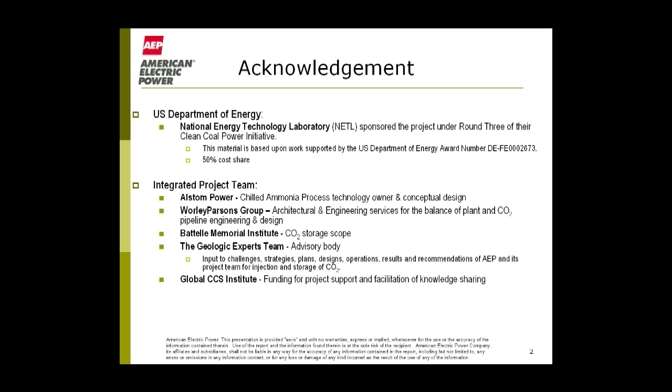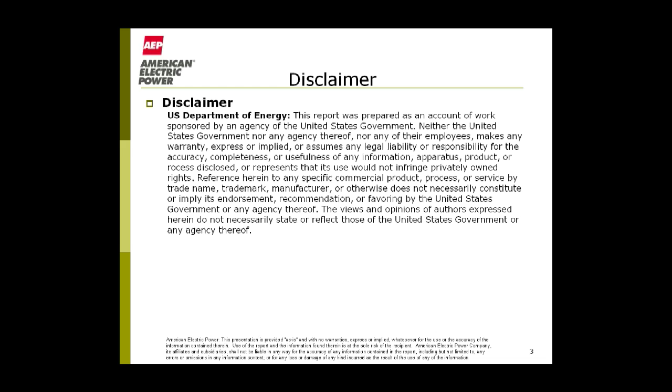This was a Department of Energy funded project, so we have to adhere to their rules as we go through the project. So there's a legal disclaimer there that we had to put in.

But what I'm going to do today, in the 25 minutes that we have, is just give you a brief overview of AEP and of the Mountaineer plant. I'm going to talk a little bit about the project from a very high level, just what our overall project objectives were, and then I'll give a brief introduction to the chilled ammonia process, which was the technology we were using. Then I'll talk through the FEED technical objectives, the summary of the FEED activities that took place, and what our deliverables were to get us to the level of accuracy that we had in the cost estimate.

I'll go through some of the key FEED studies and investigations that had to be completed up front to set the design basis for the facility, and then I'll talk through our final conclusions and key technical takeaways of the conceptual design. Then I'm going to turn it over to Guy to discuss our estimating approach, the project cost estimate, some of the major risks and opportunities we determined, and talk through some of our risk modeling.

AEP operates in 11 states. We have upwards of 5.2 million customers in those states. As you can see on this slide, and I won't go through it all in the interest of time, our coal and transportation assets tell the tale of where AEP's priority lies in its generating capacity.

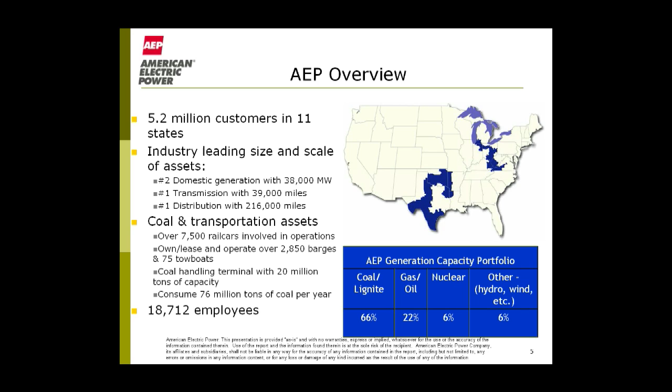Mountaineer plant is located in West Virginia, just southeast of the Ohio border. We're right on the border of the Ohio River, about 30 minutes from Charleston. That's probably the biggest city that New Haven is close to. Mountaineer plant is operated by Appalachian Power Company.

It's a single 1,300 megawatt pulverized coal plant. It has an electrostatic precipitator, an SCR, a wet flue gas desulfurization system, and it also has SO3 mitigation with a Trona system. The primary fuel is bituminous coal.

Mountaineer was a host site for Alstom's 20 megawatt product validation facility for chilled ammonia. There are 2 on-site CO2 injection wells that were used for that project, and that facility operated from 2009 to 2011. We captured upwards of more than 50,000 tons of CO2, and we stored nearly 40,000 tons of that CO2 on site. We're currently in post-injection monitoring phase of that project.

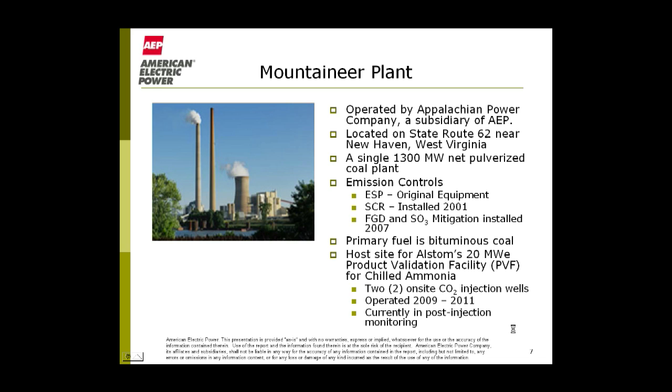So we had already had some experience with chilled ammonia from the validation facility, and we wanted to make sure that we carried that into the commercial scale project. The purpose of the commercial scale project was to advance the development of Alstom's chilled ammonia process technology and demonstrate CO2 storage and monitoring at a commercial scale.

I already mentioned who the project participants were and where the project was located. We went through some preliminary cost estimating with DOE and some models that they developed, and determined that we were looking at a preliminary cost of approximately $668 million. The agreement had DOE picking up 50% of that cost share, with AEP providing the other 50%. The technical objectives of the project are to capture 90% of the CO2 coming into the CCS facility and store 1.5 million metric tons of CO2 per year, and to demonstrate the technology at the commercial scale.

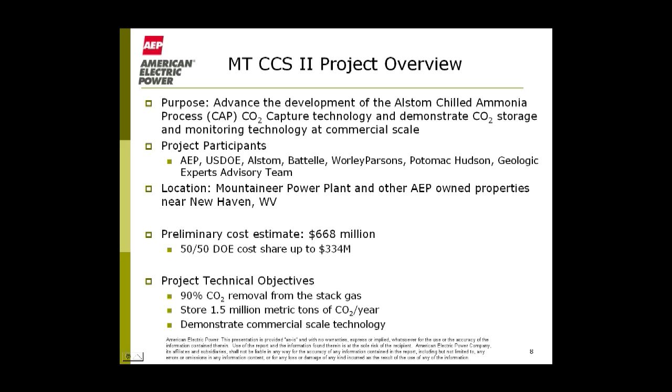A quick overview of the chilled ammonia process. Basically 3 steps: flue gas cooling and cleaning, CO2 absorption, and reagent regeneration to release the CO2. We bring the flue gas in from the outlet of our wet FGD. It's chilled in a direct contact cooler. The temperature is dropped using water, and then the cooled flue gas enters the CO2 absorber.

Where it is hit with a reagent of ammonium carbonate and bicarbonate. The reagent absorbs the CO2, and then we go to the regeneration step, where we add heat and pressure to release the CO2. The clean flue gas is then sent back to the unit's exhaust stack. It goes through various water wash and stripping steps to remove some of the residual ammonia from the process. That is where the byproduct of the chilled ammonia process is produced, the ammonium sulfate.

And when the rich reagent enters the regenerator and the CO2 is released, it's compressed and sent for storage, and the reagent is then sent back to the absorber.

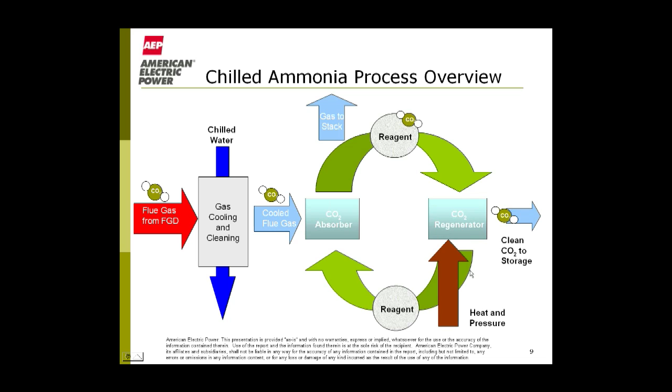The technical objectives of the front-end engineering and design process for AEP were to complete a conceptual design basis, establish our process design parameters, and determine what our balance of plant systems integration needed to be. We wanted to find a proper location and arrangement of equipment that satisfied the needs of the plant site and would also fit within the boundaries of the plant site.

And then we had to develop an environmental impact statement to satisfy the National Environmental Policy Act, which the U.S. government has established so that any major project such as this that we would enter into requires us to file an impact statement that is released to the public, outlining what all the potential environmental impacts of such technology would be.

That was a key part of this phase of the project. Ultimately, the objective was to come out with a plus or minus 25% cost estimate. So we needed to get the engineering and design documents in place to support that. And then we wanted engineering to be in a position to freeze a design early in the detailed engineering phase, which would have kicked in October of this year.

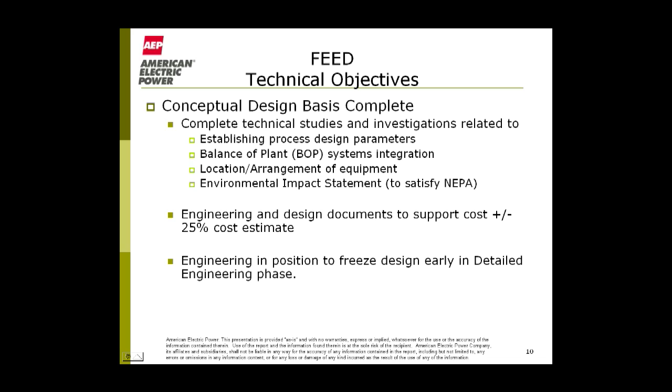Some of the FEED activities, and the key ones that we went through with both Alstom and WorleyParsons, was to define our site design conditions and criteria. This included everything from weather data, site characteristics of the plant, and available water and other utilities on the site.

AEP has been in the power generation business for over 100 years, so we've developed a quite voluminous set of design criteria for each engineering discipline. Since this was a commercial scale facility that by all rights could have been operated well beyond the evaluation period, we wanted to make sure it was going to adhere to all of AEP's engineering and design criteria, as well as other state and federal codes and standards.

We completed periodic site walkdowns with the plant to determine equipment locations and our steam ties and other BOP ties. We had integrated engineering and design workshops for both the chilled ammonia process and the balance of plant, where we placed AEP engineers in the offices with Alstom and WorleyParsons engineers to dig into the design, look at lessons learned from the validation facility, and understand where we had gaps and where we could improve. We completed those workshops in roughly an 8-week period, traveling to Germany, and Alstom traveled to us here in the States. It was quite an integrated and beneficial activity.

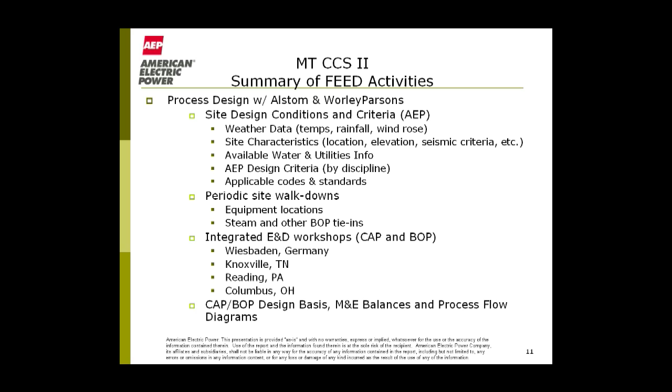At the end of the day, we had a chilled ammonia balance of plant design basis. We had material and energy balance and process flow diagrams around that design basis, and it was quite a comprehensive set of deliverables. We completed a process hazards analysis in this phase.

We utilized Worley-Parsons' proprietary process called a HAZID, or hazardous identification process. It's something that was new to AEP this early in a project, but it really paid dividends.

We sat down with both Alstom and WorleyParsons, with AEP safety and health personnel, with Mountaineer plant personnel, and with construction personnel. We really walked through this project from start to finish to identify what all of our potential hazards would be, so that we could get those documented, get issues addressed, and understand the issues that were going to be facing us in later phases of the project, trying to identify it all up front.

With this being a relatively new technology, obviously we had the 20 megawatt facility at Mountaineer, but we did not have any other CCS technologies, equipment, or processes at any of our other facilities. Going through this hazardous identification process with the team was critical, and we've actually adopted this within our own internal processes here at AEP to ensure that as we go into major projects in the future we complete this step. So this was a great lesson learned for us.

We also did detailed constructability reviews early on, with participation from AEP construction as well as construction experts from Worley-Parsons and Alstom. We talked about things like modularization. There's a lot of large equipment on this technology, so we felt like if we could bring it in as big pieces as possible, it would save us on construction time and labor.

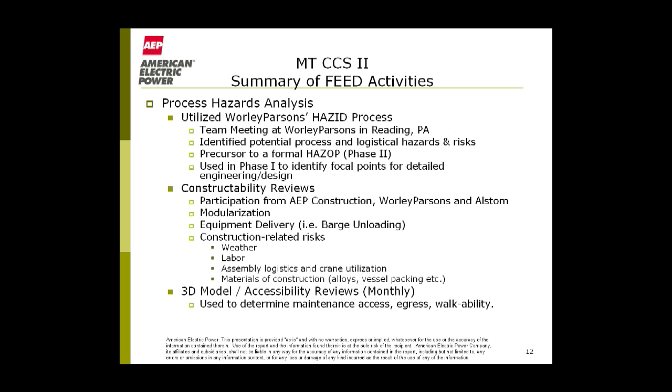Another beneficial activity during the FEED study was we did 3D model accessibility reviews. Alstom and Worley-Parsons put together a very detailed 3D model for us, and we used that model on a monthly basis to walk through the facility, look at where we needed maintenance access, where we needed access and egress, and to determine the overall walkability of the site.

The deliverables from the FEED study, again I touched on these earlier, but just to show you all the stuff that was put together: we put together detailed process flow diagrams, and we had a suite of material and energy balance load conditions.

Because the chilled ammonia process is largely dependent on ambient conditions with its refrigeration system, we not only wanted to look at the extreme summer case, but we also wanted to look at low ambient conditions where we could take advantage of free cooling and relieve the refrigeration system somewhat.

So learning from the PVF, we learned that having a suite of energy balances that address a lot of these different operating conditions goes a long way in how you size equipment and how you build margin into your design.

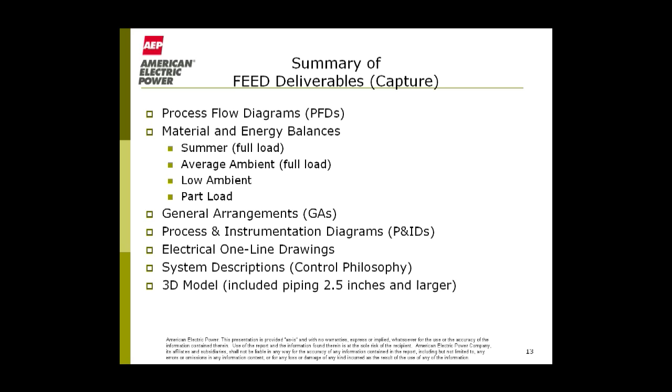We put together detailed general arrangements of the site, P&IDs, electrical one-lines. We even got down into the system descriptions and control philosophy. And then again, we had the 3D model that went down as low as pipe diameters of 2.5 inches and greater, which is pretty rare for a project this early. But we wanted to make sure that we were putting together a very accurate estimate of what it would take. Some of our key studies and investigations that I'll go through.

One was we needed to supply steam to the chilled ammonia process, and we did learn that we could do that with Mountaineer's existing steam turbine arrangement. With the existing steam capacity in the Mountaineer turbine, we found an ideal location to take steam between the intermediate pressure turbine and the low pressure turbine, where we could supply steam to the chilled ammonia process at its required temperature and pressure, even as the Mountaineer unit followed load and would cycle up and down on load. So that was a big benefit for the team, to locate one steam extraction.

For the high pressure regeneration steam, or I should say the higher pressure regeneration steam, it's still a fairly low pressure stream. But we wanted to find one point where we could operate for a range of unit loads as opposed to multiple steam extractions that would potentially require significant changes to the turbine. So that was our criteria going in, that we didn't want to alter the steam turbine at Mountaineer very much.

If at all, for this process, because it's one of several 1,300 megawatt steam turbines on our fleet. We try to maintain common equipment on those units so that if they have an issue where they need repair or spare parts, we can keep a common supply for those turbines. So that was important to us.

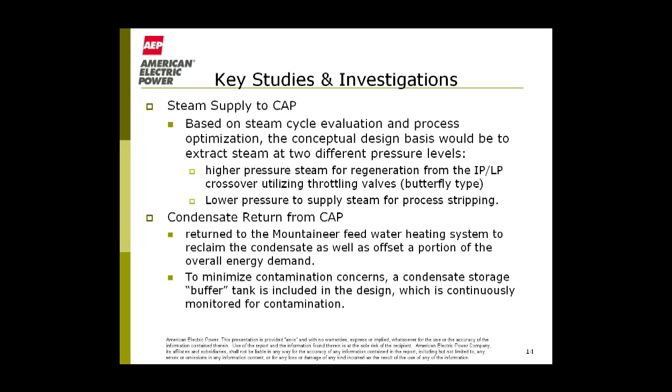The plant had some concerns, however, bringing that condensate back into their feed water heating system, because it could well be contaminated if there's a leak in some of the process heat exchangers on the chilled ammonia process. They could bring back some contaminated condensate. To minimize that concern, we put in a condensate storage buffer tank that would be continuously monitored for contamination, to give the plant comfort that anything coming back into their existing system was safe.

We did a detailed reagent and refrigerant study where we looked at potential reagents for the chilled ammonia process. We looked at upwards of 20 plus refrigerants. The PVF utilized R410A, and we realized that with the inventories and whatnot required for the 235 scale, that just wasn't practical. So we did a pretty exhaustive study and determined that anhydrous ammonia was the adequate reagent.

Just because of its high concentration, it allowed maintainability and control of molarity within the process. It had the least risk of any impurity additions. We looked at aqueous ammonia, but you're bringing in a lot of water when you do that, so that's water you ultimately have to handle in the system. And then it had the lowest capital and operating costs of all the reagents that we compared.

The refrigerant ammonia offers the lowest energy consumption and the highest efficiency out of all the refrigerants that we studied, with the lowest installed capital cost. And again, ammonia has minimal environmental impact with respect to its global warming potential, and that was why we were entering into this project to begin with. So we felt like we needed to keep that as a priority.

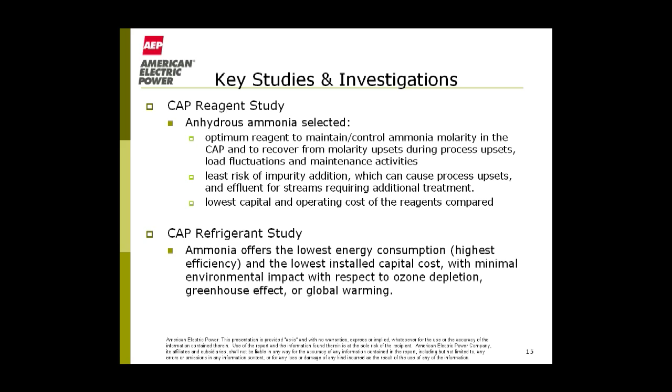The byproduct handling - as I said, from the water wash phase of the technology, you get a fairly concentrated stream of ammonium sulfate. We talked to some end users of that product that would use it as a fertilizer material, and they expressed that they would prefer to have that in around a 40% by weight solution. That played right into the chilled ammonia process, which we were getting a stream at around 15 to 25% by weight.

So we included some equipment in the design to further concentrate that up and provide a 40% by weight ammonium sulfate solution that we could then resell, or in the case we talked about for phase one, we're basically just giving it away to avoid the cost of disposal.

We did have Alstom's model runs of ammonium sulfate and what the constituents were estimated to be. We shared that with local agricultural officials, and they had some specifications for ammonium sulfate fertilizers, and we were well within their specifications for heavy metals and whatnot. So we were confident that this is a product that could be beneficially used from the process.

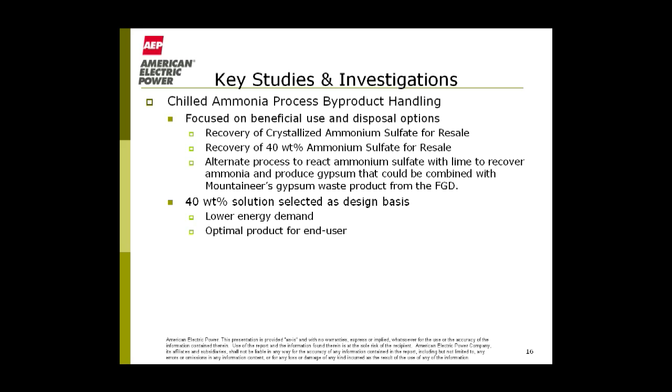We did a CO2 compression study. That report is going to be posted very shortly, or may already be posted on Global CCS Institute's website, to explain the details of that. But basically, going into the project we thought we were going to see maximum injection pressures into the well, upwards of 3000 psi or 207 bar.

The injection pressures we found as we operated the PVF were much lower than that, in the 1200 to 1500 psi range early in the life of the well. So we looked at conventional compression to an intermediate pressure, followed by variable speed pumping, to allow us the flexibility of injecting at only the required pressure, and not compressing all the way up to what we believe the formation could handle at some period in the future, and wasting all that energy. We found that compression followed by pumping was optimal in that scenario.

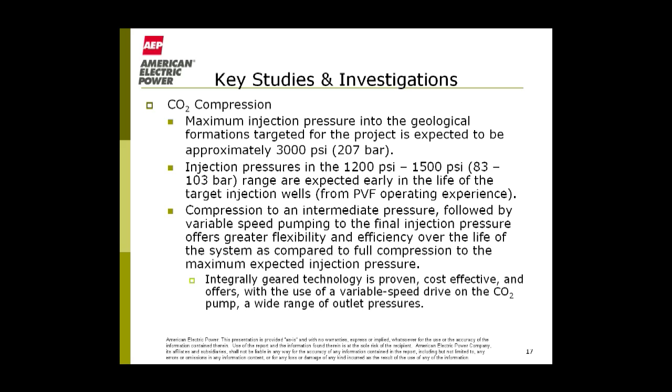That was a key takeaway from the project, and you'll see that show up again later in our key takeaway slide.

Again, we developed some high-level system descriptions and control descriptions for the process. All control and monitoring associated with the chilled ammonia process and the injection wells was generally going to be controlled by Mountaineer's distributed control system, the DCS terminal at the plant. However, it would not be in the main unit control room. We had a dedicated CCS control room located near the chilled ammonia process facility, so that we could keep its operations close coupled to the process.

There was no direct control of the Mountaineer unit in that CCS control room, which, with some security regulations that were in place, allowed us to circumvent a lot of the processes and procedures that would need to be in place if we were going to house that control room in the main plant's control room. So we avoided some of that additional capital and expense of going through the security issues there.

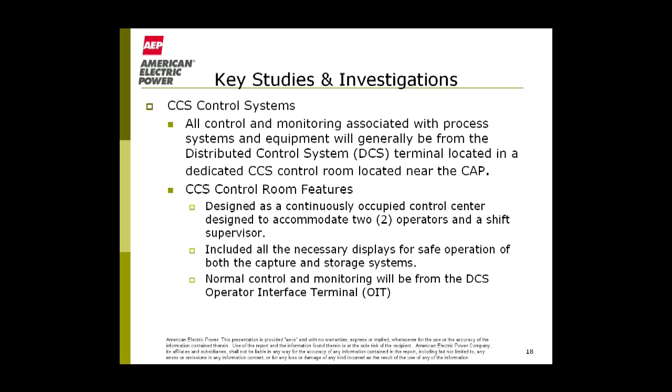The control room features: it was designed to be a continuously occupied control room with 2 operators and a supervisor. It included all the necessary displays for safe operation of both the capture and the storage system. We could monitor what was going on in the storage wells from that control room as well, and it was quite sophisticated.

The conclusion of the FEED, again, the conceptual design basis from our point of view was sound and poised for kickoff of the detailed design and engineering phase. We felt like the chilled ammonia process design would meet its stated objectives.

We were confident that from the operation of the PVF we carried over the pluses of that system, and we eliminated some of the minuses of that system. The scope of integration was practical and achievable from our standpoint. The parasitic load estimates were accurate and realistic.

The design basis more than adequately supported a plus or minus 25% cost estimate, and I think as Guy gets into his portion of the presentation, you'll see that it was more probably a 10 to 15% accuracy in our cost estimate, just because we put so much rigor into our conceptual design documents. And then we felt like opportunities for improvement certainly existed and could be realized in the detailed design phase.

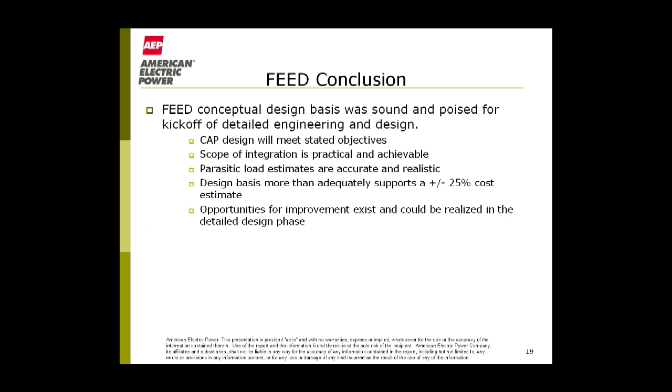Key takeaways: again, the overall conceptual design and integration into the Mountaineer generating station was a success. We felt like we had a conceptual design that would have worked at the plant, and that the plant operations could have successfully operated.

One thing that we did learn was to keep your integration expectations practical. This is early technology, and trying to go in with a lot of expectations of how you can integrate to save the overall energy and reduce your overall energy demand -- we felt like you need to keep that practical and within what the plant operations staff can handle. A unit of energy is not a unit of energy.

You've got to realize at what value you value your heat, and at what value you simply decide that you're better off just throwing it away because of the capital expense and the technical complexity that integration introduces. So we kept our integration expectations practical for this scale, and we feel that as the technology evolves in the future, much like flue gas desulfurization and other means of emissions control, we will find where we can integrate and we will optimize where it makes most sense.

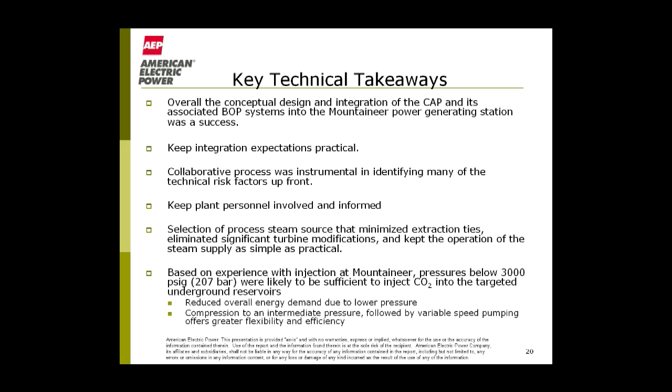We based this on the experience at Mountaineer with their injection pressures, which were below what our maximum target was. That was a big learning key for us. We found it was going to be sufficient to inject CO2 at pressures well below that, and we could reduce the overall energy demand and allow ourselves some flexibility with the use of compression and pumping equipment.

So I'm going to turn it over now to Guy and let him talk through our estimating approach a little bit, and talk to you about the risks and opportunities that we found during our cost estimate phase. So without further ado, here's Guy.

Thanks very much, Matt. Very much appreciated. Just a quick introduction here: Guy Cerimele is a project manager in the generation business unit of American Electric Power. He has 26 years of wide-ranging experience in the electric power industry, including past positions in engineering, environmental affairs, and governmental affairs. Guy's project management experience includes both new coal and gas-fired generation. His current responsibilities include serving as project manager for AEP's carbon capture storage project. He is a professional engineer and certified project management professional. As project manager, his specialty area focus is project risk management. Welcome, Guy, and look forward to your discussion of the estimate approach.

Thank you, Martin, and thank you, Matt, for your discussion, basically setting up a lot of the inputs to the estimate that we'll discuss. Up in front of you is basically the approach. While it's noted that this is a plus or minus 25% cost estimate, in reality this is a very tight estimate, and it's really an upper limit estimate that we're going to give you. We did a bottoms-up approach here, where in working with Alstom and others, major equipment costs came in on budgetary quotes for over 95% of the equipment. The 3D model, as Matt mentioned, provided us a very detailed view of the system and included all piping down to 2.5 inches in diameter.

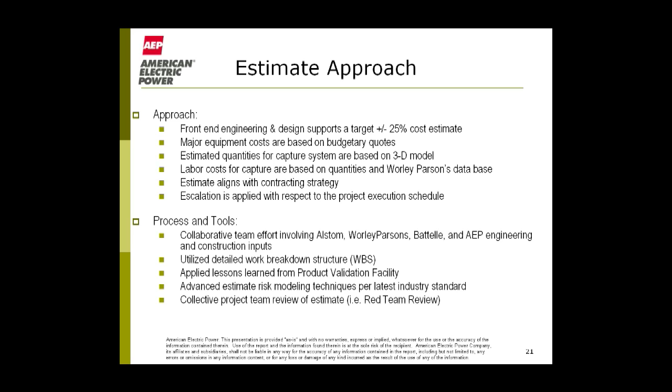As part of the scope of the estimate we're going to show you, the big risks in this project are associated with the injection monitoring system and post-closure care. We are showing 2 injection wells for this particular project, 9 deep monitoring wells, 4 intermediate wells, and a characterization well.

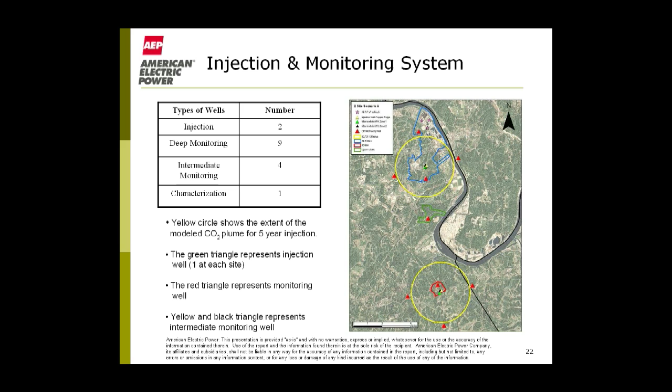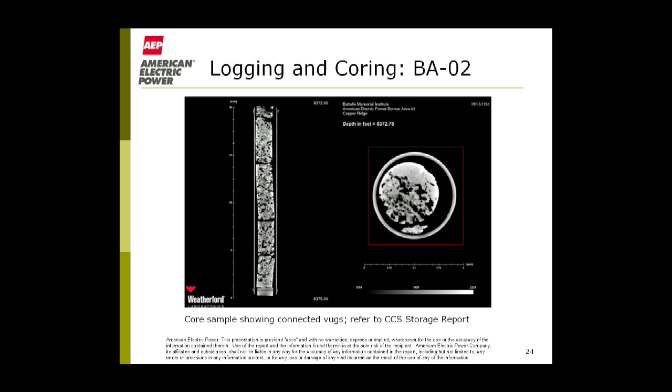Well, back to the estimate. The figures I have in front of you, I want to underscore that the cost uncertainty is on the storage side. I didn't put in figures distinguishing capture and storage. We are encouraging our readers to go to the FEED report when it's available to truly understand everything we considered in this estimate and where all the uncertainties lie.

Phase 4 operations we figured at $66 million. Total project costs, $1.065 billion. Again, this is a bottoms-up estimate based on 10 to 15% engineering and use of a 3D model.

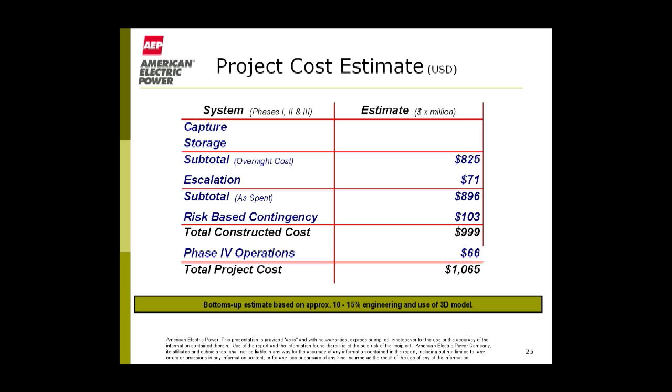Quickly, I'm going to hit a couple risks here; we do encourage you to go to the detailed report. Escalation is a big issue for us — we had wide-ranging scenarios considering a double-dip recession and the possibility of hyperinflation with some commodities, similar to the hyperinflation we experienced 3 and 4 years ago. So as economies recover in this time frame, we are worried about escalation, and there's a lot of variability there.

I mentioned the underground injection control permit — it's a first application here in the United States, and there's significant risk around the cost and number of storage monitoring wells we'd have to put in.

Craft labor is another issue for this particular project in the U.S. in general. The electric utility industry has a number of regulations being imposed on it right now requiring considerable expenditures, and there's a possibility we could run into a labor shortage.

Scale-up risk is a possibility on the capture side, but based on our operation of the PVF, we don't see a lot of risk in scale-up. The biggest risk in scale-up might be the long-term ability of the materials to hold up under potential corrosion.

Opportunities — we see a lot of potential down the road in phase 2 detailed design to reduce costs. We see modularization as a way to save additional costs, applying AEP's experience there. Alstom also performed a RAM study that showed us where we have significant savings in reducing spares and maintaining reliability of the facility going forward. We also believe we're significantly over-designed on structural steel.

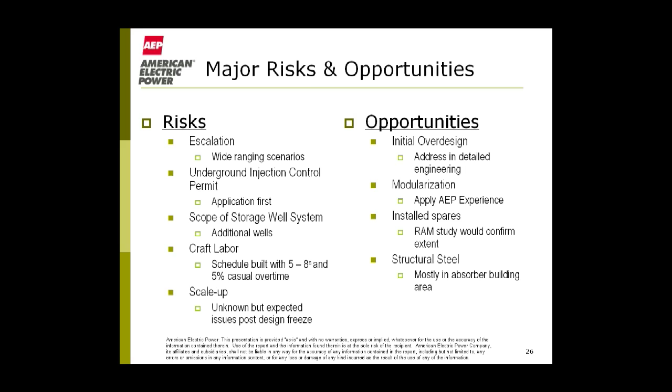This next page shows a relative ranking of the risks. You can see the biggest risk on this project is the number of intermediate wells — there's a possibility we could be subject to a requirement to install an additional 10 intermediate wells at $4 million a well. Labor overtime is our second biggest risk, and then you'll see escalation volatility around materials, labor, and purchased services as other big risks.

We have risk around installation of the deep wells and injection wells in terms of the inherent uncertainties around drilling and the costs you're exposed to. The two risks shown for support steel are actually opportunities for cost savings, but they're shown there relative to the other risks.

This project will range, all in, upper limit anywhere from $962 million to $1.065 billion. I want to remind listeners that $66 million of that is attributed to operations of the facility in phase 4 for just about 4 years.

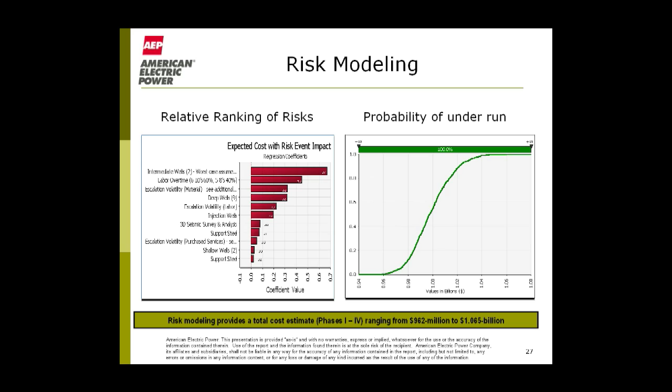In summary, we'd like to say that the work completed in phase 1 really continues to support the commercial readiness of Alstom's chilled ammonia process technology at that intended scale. AEP and DOE have a real good understanding of the project's risks and capital costs.

And the cost of expected O&M during phase 4. We believe this completed front-end engineering and design package provides a sound basis for completion of the project when conditions warrant its continuation for this particular project or a similar project elsewhere in the U.S.